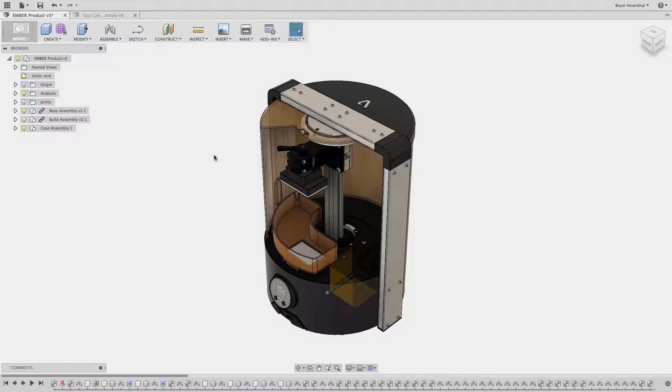To start, while designing, usually a tool is used to create complex surfacing, then another tool is used to add parametric features, then another tool is used to make direct modeling changes. Fusion 360 is a surface, parametric, freeform, and direct modeler all in one package. We will start by demonstrating this in the Ember assembly.

To start off, we will open up a subassembly of the top cabinet assembly. I will open the assembly out of the browser, which is like our assembly tree on the left side. Also notice my feature-based timeline is at the bottom of Fusion 360. We will talk more about these two being in the same environment throughout this demonstration.

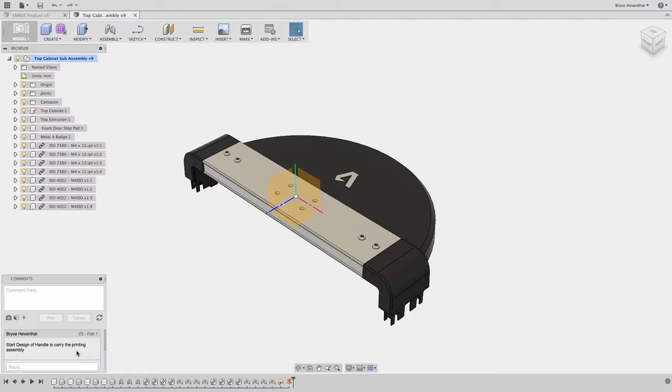Now, from within the design, we can see different decisions that were made throughout the design process in the commenting section. For this design, we will use the top-down design approach to design the handle. So let's start a sketch on the front plane. Notice that I didn't have to create a new file or component or activate a component. I just put the sketch at the top level of the assembly.

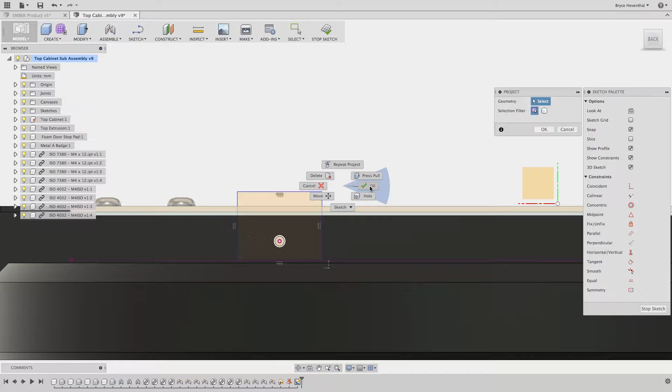Fusion 360 gives us the ability to have sketches, bodies, and components all in one file. We will start off by using a rectangle and use some construction lines to center this sketch about the hole. Then we can add a few dimensions to fully define our sketch.

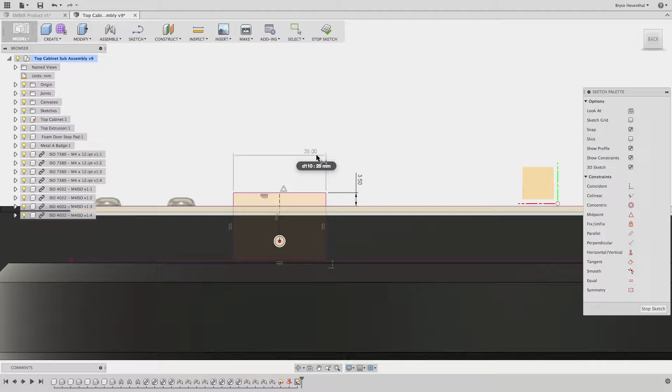The advantage of using the top-down design approach is that if the height of the top extrusion changes, the bracket of the handle will always remain 3.5 millimeters above the extrusion and centered over the hole. Now let's turn this 2D sketch into 3D geometry. I will select this top profile.

Notice Fusion 360 is intelligently guessing what type of operation I would like to use. In this case, Fusion 360 is joining the new extrude to the top extrusion component as highlighted in the browser. Now, if I wanted to select another profile that causes this extrude to run into an existing body, it will automatically convert into a cut operation. No need to have two different commands for similar Boolean operations.

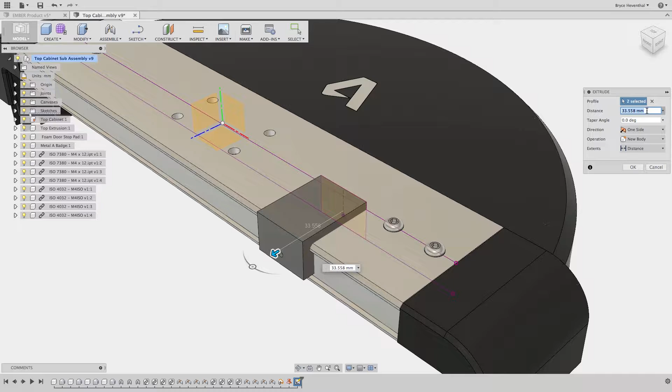Of course, I have the ability to change to join, cut, intersect, or add a new body or component. In this case, I will create a new body. I could create a component anywhere in the design process, but I will demonstrate this later. Now I have a body that is overlapping over this aluminum extrusion.

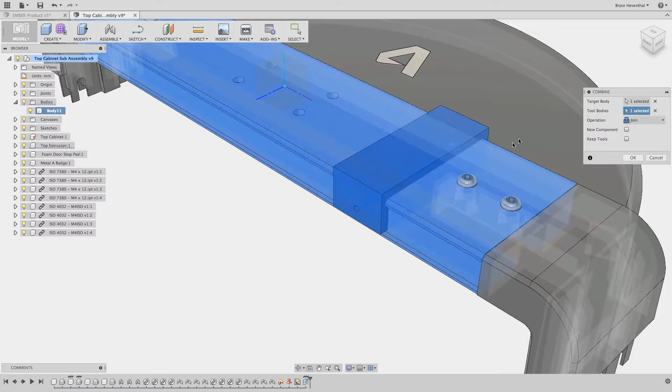We can see this interference with an interference detection. To get rid of this interference, we can use a combine Boolean cut operation. This will cut out the interfering section. There's an extra body from this cut operation on the inside which is unneeded. We can choose to remove this body and it will place a feature in the timeline.

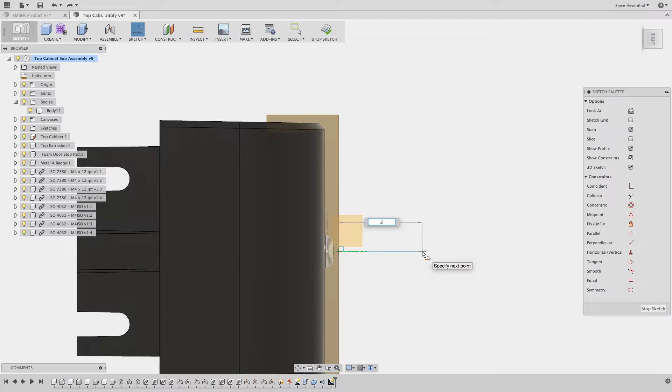If I ever need the body back to use in this design, I can simply roll back or suppress the removed feature. Now, I know I want the handle to be above the bracket by 25 millimeters, so I can create a sketch on the face to locate the handle. As I'm sketching, I can type in the dimensions of the sketch entities to sketch and define the sketch at the same time. This will truly speed up my sketching process.

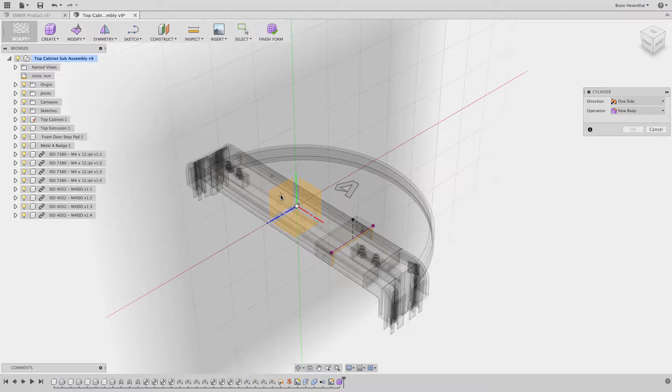Up to this point, we have been parametrically designing this bracket around the top cabinet assembly. Let's go ahead and jump into the sculpt environment. We'll start off by using one of the primitives, and then we will use simple push-pull gestures to sculpt our design into our desired shape. We can input our desired length and diameter of our handle.

Now, when I drag this slider, we get more or less faces depending on the direction I slide. Ideally, we would like to place more faces in areas of higher complexity. Using T-splines technology, we can add more faces where desired rather than having a lot of faces across the entire body, which will slow down my computational time.

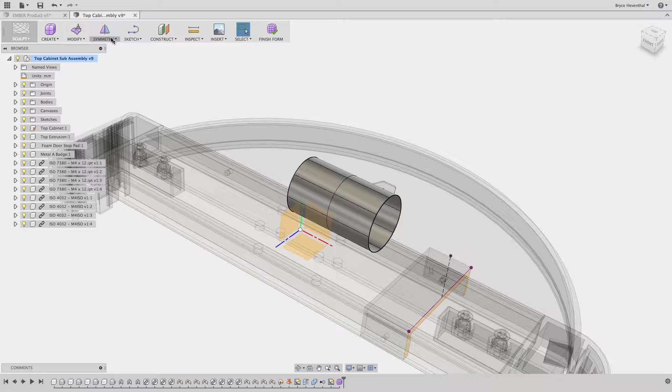Now, I want to add symmetry about the front and back of the handle. Fusion 360 will give us a green line for our symmetric plane. When we start sculpting, we can select faces, edges, and vertices to manipulate. Selecting faces influences our design more than edges and vertices, and then selecting edges influences higher than vertices.

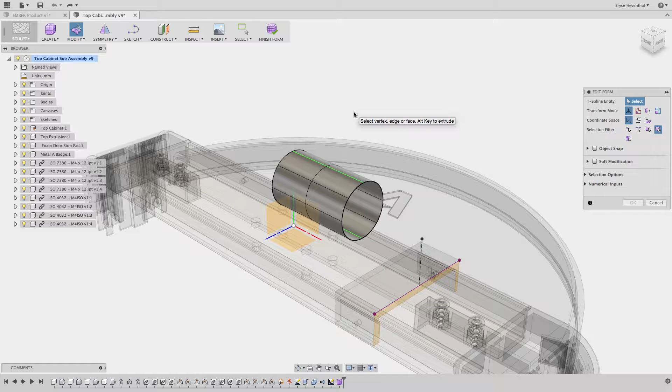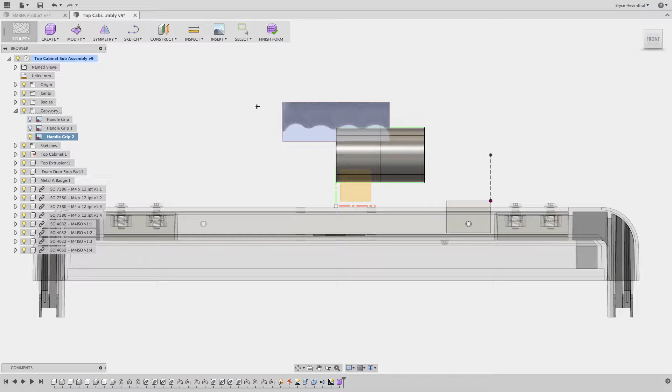Next, I have a reference image I want to use as a guide for our handle assembly. I will insert this as a canvas onto the XY plane. We can resize and relocate the image over our body. In addition, I will change the opacity and allow the image to be visible through the body. When importing images, there's no physical size associated with the image, so we can use the calibrate tool to size the image to the body we created.

Next, I will start forming our body to the image. Unfortunately, moving this edge does not give me the desired result. In this case, we need to add some edges to be able to get the desired result. I will select this inside edge and insert two edges on both sides. Now I can use these newly created edges to manipulate our design.

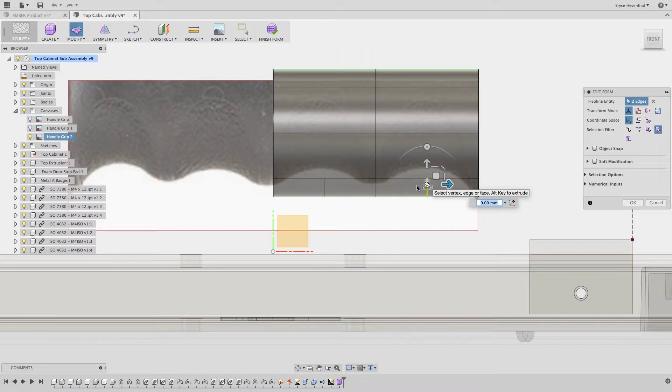Adding these new edges created a T-junction. This is where the T in T-splines comes from. We can add complexity by adding edges, and it forms these T-junctions. Once I have the entity selected, I can use the triad to either translate, scale, or rotate the selected entity. We can select this entire edge and make a flat portion for the palm of my hand to rest on.

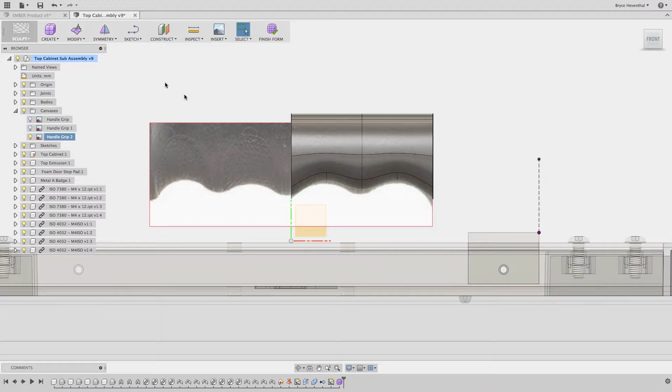I am designing half of the handle, and I'm going to mirror about this middle plane in the future, but I am worried about causing a sharp point in the middle. So we can mirror the T-spline body, and notice that this body is always trying to retain its curvature continuous nature as I make changes.

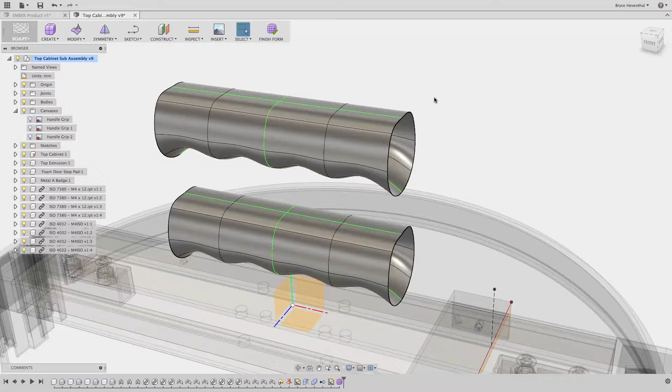Now we've come to a point where we want to see some different design ideas. I can copy and paste my body and move it above my current body. Here we can make some changes to the newly copied body to quickly iterate on many design ideas. This will help flush out some bad ideas before arriving at the perfect idea for our concept. We will use the soft modification to influence the fall off as we manipulate these faces and edges. I like the new design, but I think the original handle will be more versatile, so we will run with the flat handle design.

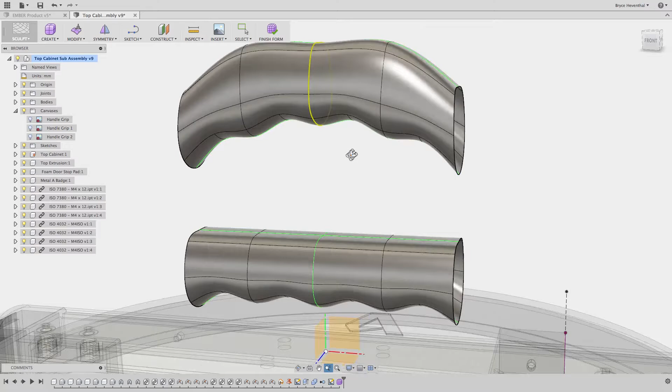Next, I want to start working on the transition to the bracket of the handle I created earlier. I'm going to use this great tool called Convert. In this case, Convert can be used to convert a parametric face into a T-spline body. Then I could start deleting these faces where I want the transition to occur. This new body is just like any other T-spline body. I could use my push-pull gestures to scale and move. I can also add faces where needed to help control the transition.

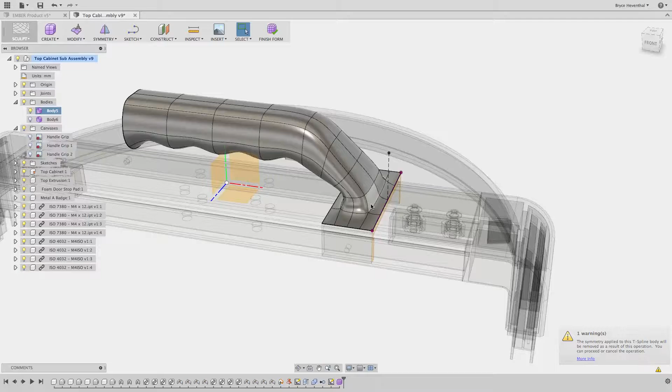Now I'm set for combining my two T-spline bodies. Let's use a bridge to bridge the gap. Fusion 360 will automatically calculate the transition for our design. This new body behaves just like before, where I can use my push-pull gestures to dial in the shape of our design.

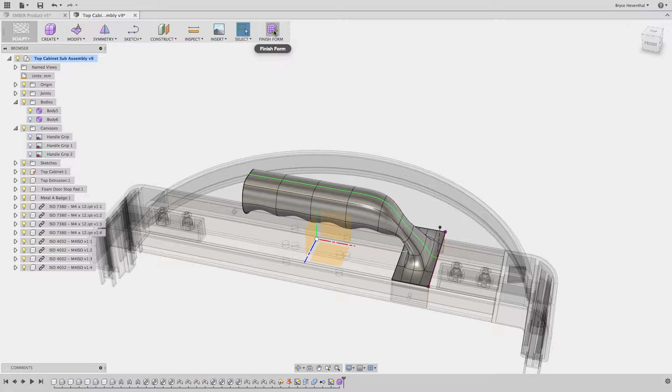Now, I'm just about the point where I've completed the sculpted body, so let's go ahead and finish this form. Once I exit this freeform workspace, the body is automatically converted into a NURBS surface. I can use this just like any other surface in Fusion 360. In this case, I want to use it to form half of my handle.

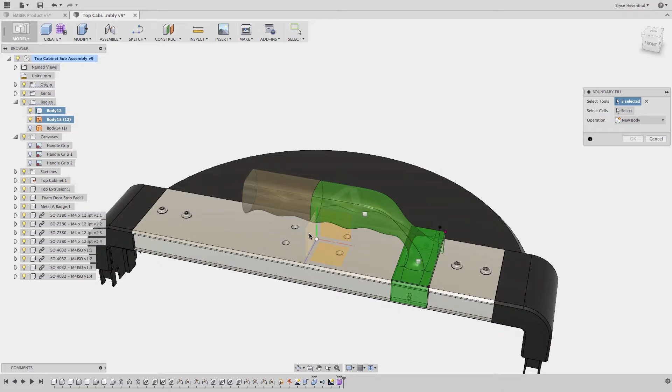So I will create a boundary fill. This tool will find different volumes from my selected tools. Once I select my tools, I can select the different volumes I want to keep. Then I am left with a few tool bodies and half of my handle. I will proceed with removing a few bodies to keep my browser clean.

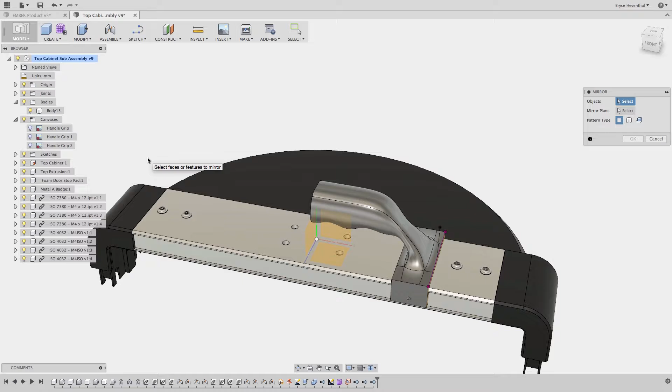Now let's work on completing this handle. I sometimes forget where commands are located though, so we can search for commands and add them to my toolbox if I'm going to use them frequently. Fusion 360 makes it easy to locate commands so you could keep your mind on the design. In this case, we searched for the mirror command and then created the mirrored half of our handle. Then we can quickly combine them back into one body.

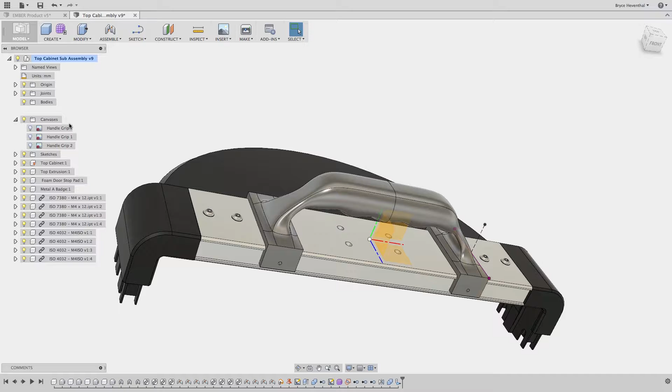Till this point, we have been working on a body at the top level of this top cabinet assembly. Two main reasons to turn a body into a component is for bill of materials or assembly motion. Fusion 360 allows an engineer to turn bodies into components when convenient in the design process. We can give this new component a part name.

Next, I want to create an overmolding for a rubber gripping surface. So let's create a sketch to use as a cutting tool. I will sketch a spline to get a curved gripping surface. In addition, I will create a center line to use for symmetry.

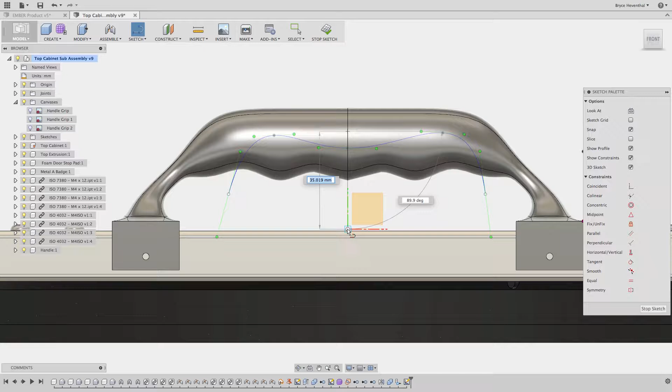If I'm going to apply the same constraint to several sketch entities, I can select the constraint out of the sketch palette and the constraint will remain on, so I can rapidly apply this constraint to multiple sketch entities. No need to control select multiple entities, then select the constraint out of a submenu over and over.

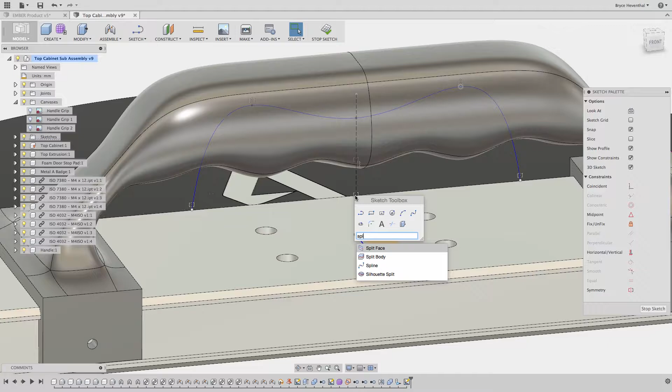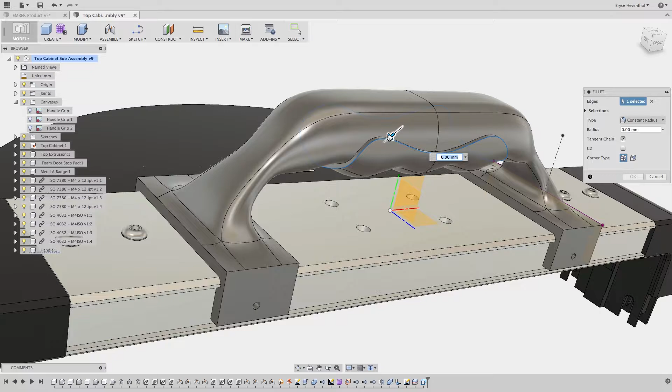Now, when I select an edge, press pull will turn into a fillet. This tool will change depending on what is selected and help design faster rather than searching for the correct command. Now make sure you pay attention. Here's the cool part. I have created a freeform gripping surface for the handle. Then I made some parametric changes to it.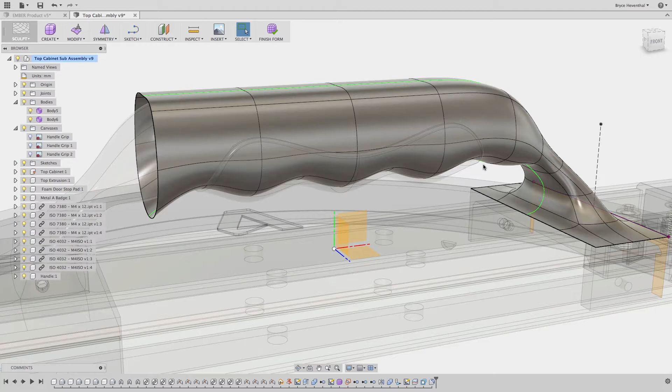Usually when a design change is required to the freeform surface created early in the design process, multiple changes are required between multiple tools. In Fusion 360's integrated tool set, when I make a design change to the surface, the downstream features will update accordingly. No need to recreate surfaces or fix a bunch of red and yellow features in the feature manager tree.

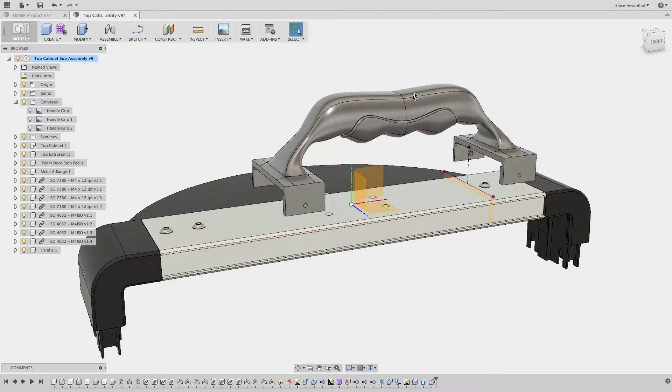Now, this component is floating in space right now and doesn't know how it interacts with the rest of the assembly. Fusion 360 has rethought how designs are assembled. First, the assembly tree and the feature tree are in the same file. Second, this handle was designed in context of the assembly, so why do we need to pull it apart to apply mates or constraints to assemble it back together? We have an as-built joint for components designed in context.

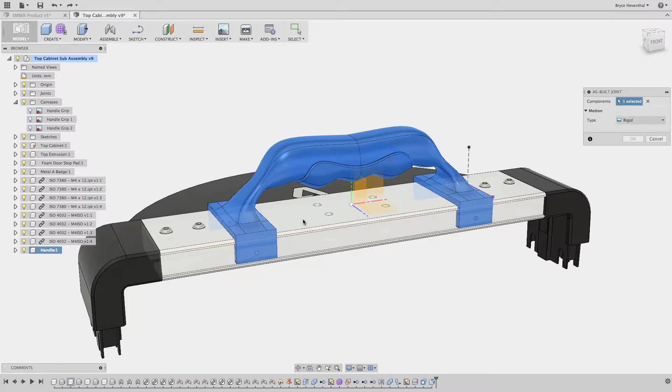Third, when mating or applying constraints, usually an engineer is trying to lock down all 6 degrees of freedom, 3 translations and 3 rotations. This usually takes about 2 to 3 constraints or mates to get the desired motion. In Fusion 360, we apply one joint. We lock all 6 degrees of freedom down and change the joint type to get the desired assembly motion. This will help designs get assembled faster and behave more robustly when design changes are made.

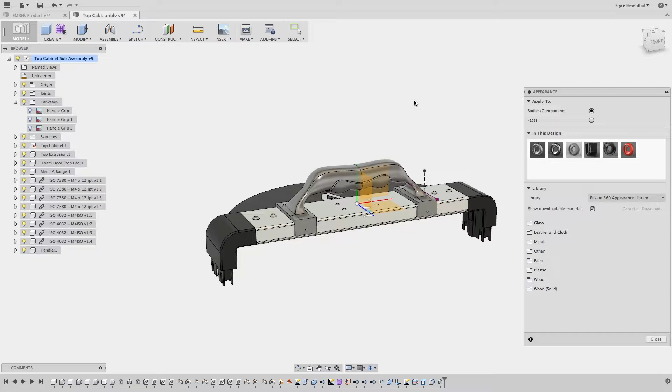Finally, I will go ahead and add a few appearances to our handle. I will access our customizable appearance library to apply a red plastic appearance to the handle and a rubber appearance to the gripping portion.

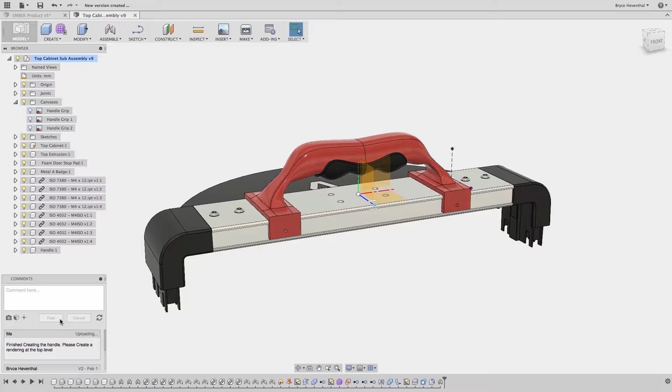Now that we have completed our design for our handle, we can leave a comment documenting the design changes. This comment will travel with the design and produce a trail of how and when design decisions were made in the design process. In addition, this will save a new version of the design. Don't worry, if I screw up, we can always roll back to a previous version.

Let's switch over to the top level assembly. Whoa, you might notice my handle is not in the assembly. Why hasn't it updated? Well, in Fusion 360, we don't automatically update the reference to the latest version. In other tools, sometimes bad design changes are made, and they are propagated to the top level assembly. We allow the user to choose when to update to the current version.

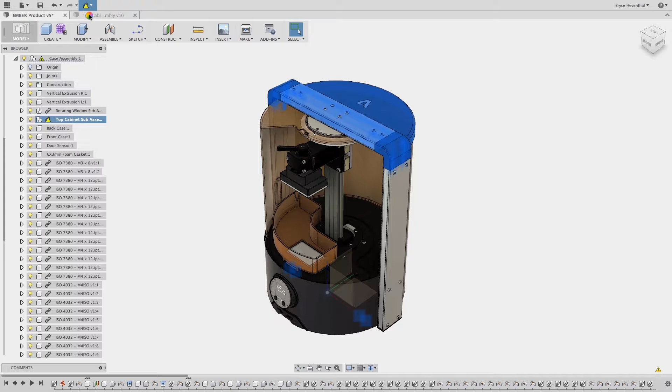In addition, we can always choose an older version, just in case the changes I made would cause errors. This will prevent design teams from having to fix red assembly trees from unwanted changes to the top level assembly. Versioning is inherently built into Fusion 360 and doesn't require a complex PDM system to implement.

Now we have a need to produce a rendering of this design for marketing. Let's switch over to the rendering workspace. Here we can change the scene and scene settings, such as adding depth of field to this image. Finally, I could turn on the ray tracing to leverage my computer's hardware to calculate the light bounces in this image. Unfortunately, I need to start producing CAM toolpaths to run my Haas mill.

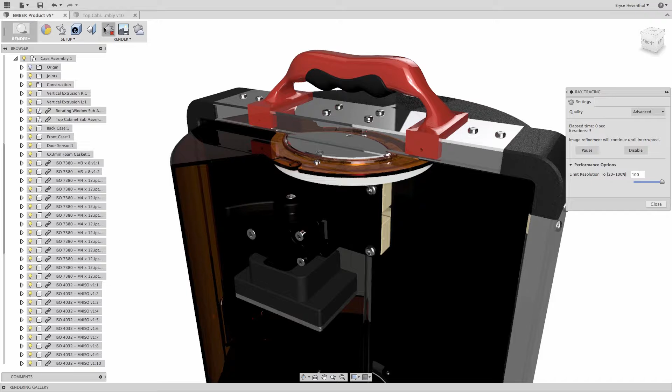While this image is being rendered, it is using up a majority of my computer's resources. Instead, I could start a cloud render. This will leverage the nearly infinite resources of cloud computing. I can set a few parameters, and in a few minutes, Fusion 360 will return a render without having to stall my design team from leveraging their computer's hardware.

While that is being rendered, let's check out the design in A360. This is Fusion 360's data management and collaboration tool. A360 is an essential part for a design team to work together and understand how different design data is related. Let's jump to one of the subassemblies of this top-level assembly.

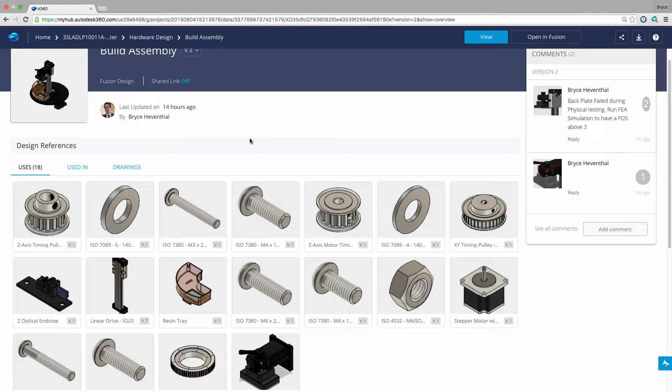In a web browser, I can see what design my file is referencing, where it is being referenced, and any drawings that may have been created. It is also a great tool for non-CAD personnel to collaborate throughout the design process. A360 also displays the related data created during the design process in other workspaces, such as CAM, animations, rendering, and simulation results.

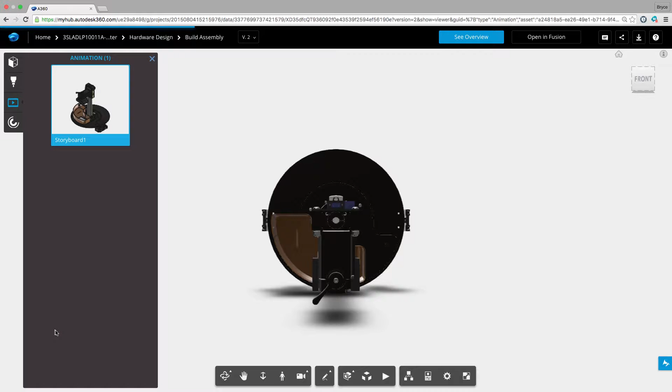Right in a web browser, we can jump into the immersive experience and see the animation created within Fusion 360. In addition, I could jump into the design and interrogate the assembly tree and see which components this design uses, such as what type of fasteners I chose to use for the printing bed.

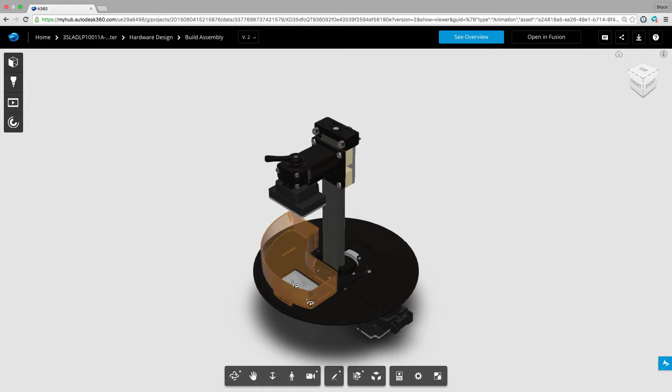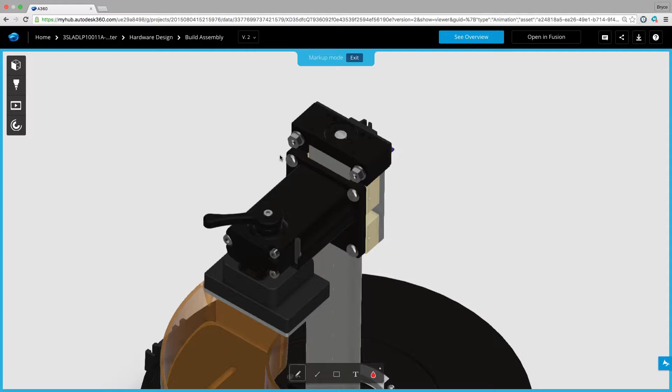Let's open up the commenting pane. Here we can see different comments that have been made throughout the design process. Usually these are key design decisions made between multiple stakeholders' email boxes. Now I have a centralized location for all design decisions made throughout the design process that can be audited for when and why decisions were made.

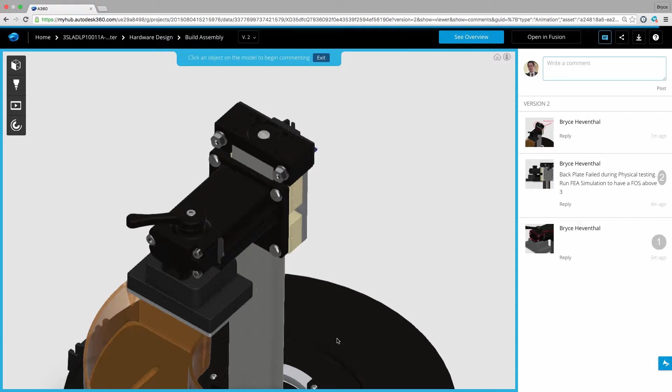We could start redlining our design right in a web browser to better illustrate required design changes. Gone are the days where we would have to try to describe with text what we wanted changed in the design. In addition to redlining, we can create comments on points or objects. These will produce a balloon referencing the selected entity to better illustrate what needs to be changed.

Of course, any of these comments can be seen in Fusion 360 as well. No matter where you are, an engineer can hop on a web browser and still collaborate on key decisions that need to be made throughout the design process.

Now we need some input on a design change from some external stakeholders. From Fusion 360, I could start a live review session. This will generate a link which I can copy and paste into an email. Once my external stakeholder receives the email, they can click on the link and it will open up in a web browser. An interactive web experience will be open in the web browser where they can collaborate on design changes.

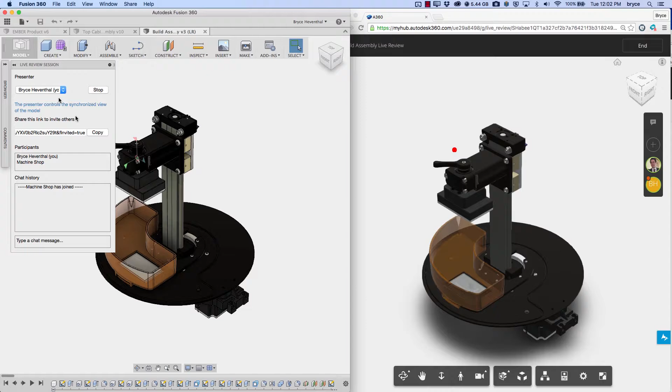Here I can choose the driver and make design changes. In real time, the design changes are propagated to their session. In addition, I can choose to make them the presenter. They can collaborate on what needs to be changed from a web browser anywhere in the world. This will truly change the way design teams collaborate with both internal and external stakeholders.

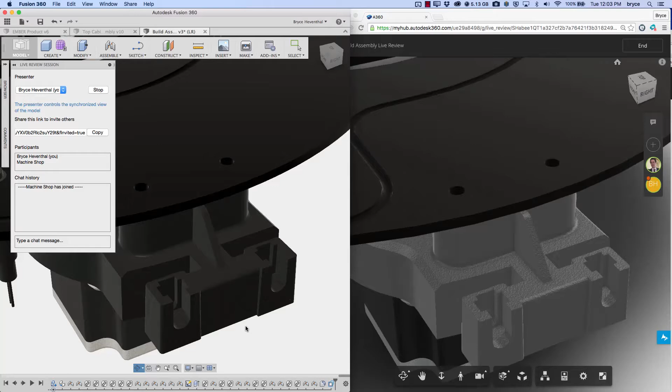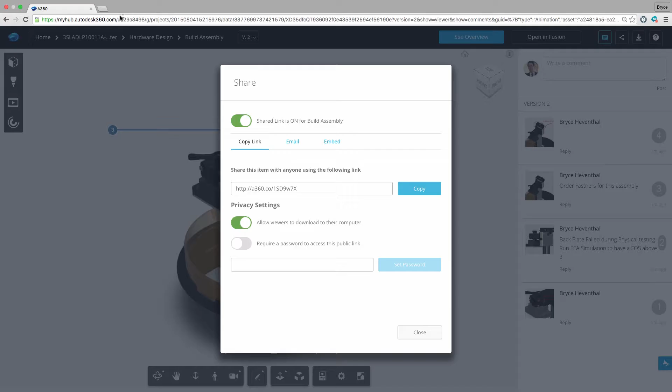Now, I need to send a file to a machine shop for them to start some post-processing work. I can start by sharing a link. Here I can give them access to download the file or password protect the link. Once they click on the link, they will see the design in a web browser. Here, they can choose which file format works best for their post-processing tools. There is no need to download a viewer or worry about file compatibility or send them the wrong file type.

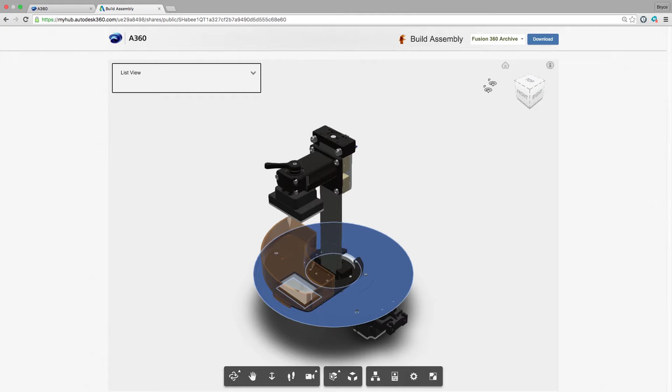This shared link changes the way design teams will work with external stakeholders. Of course, I can close the link to stop access to the file in case I no longer want to share my design with external stakeholders.

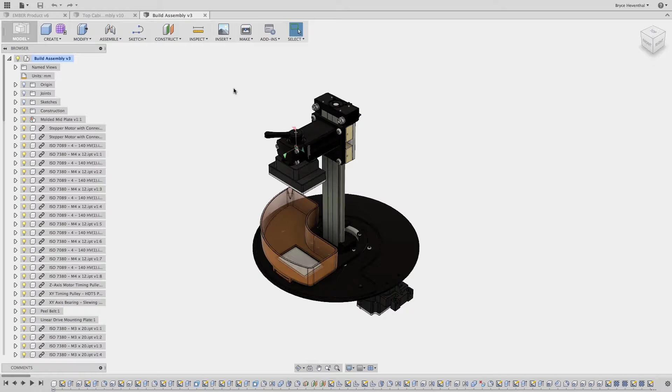Throughout this demonstration, we have seen how we can have multiple designers, engineers, managers, and external stakeholders collaborate on a design. We have also seen how Fusion 360 integrates different modeling techniques, such as freeform, parametric, surface, and direct modeling, all in one package. Now, we will demonstrate how Fusion 360 integrates post-processes such as simulation, CAM, rendering, and animations. These post-processes will update accordingly from design changes made throughout the design process, which will reduce the amount of rework required to set up these processes.

We will open up a linear drive subassembly to start setting up the required procedures to start generating G-code to start running my Haas mill. CAM toolpaths can be generated in the CAM workspace, which will update from design changes. Once in the CAM workspace, we can see different CAM commands to help program our part. We can start by creating our first setup. We will orient the Z-axis and pick the location for the pickup of our part. We will use this corner to probe when locating our part in our machine.

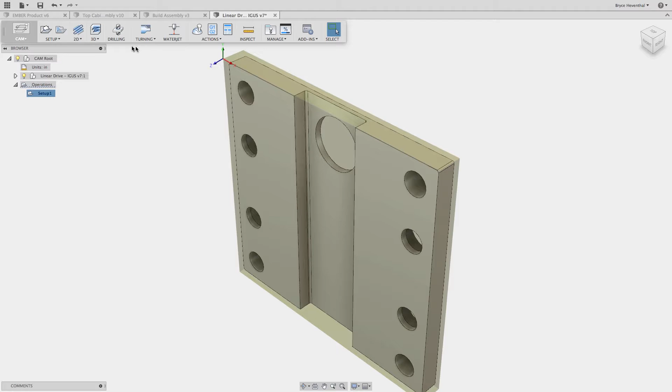Normally, we would take this time to measure our stock with calipers, and we can input these values on the stock tab to ensure our part is cut to the correct dimensions. Next, we can start by facing our stock to our part. To do this, we can select the facing operation, select the face, and hit OK. In a few clicks, we have generated our first toolpath.

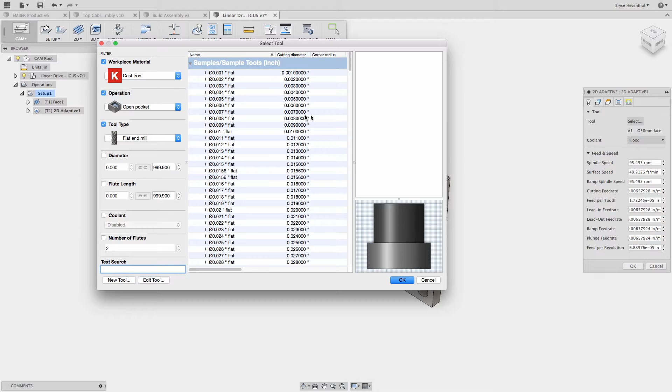Now, let's start roughing out the inside slot with an adaptive clearing toolpath. Adaptive clearing is a roughing strategy available for clearing large quantities of material effectively. It is unique in that it guarantees a maximum tool load at all stages of the machining cycle. Our roughing toolpath will ensure that wear is uniform across the length of the tool.

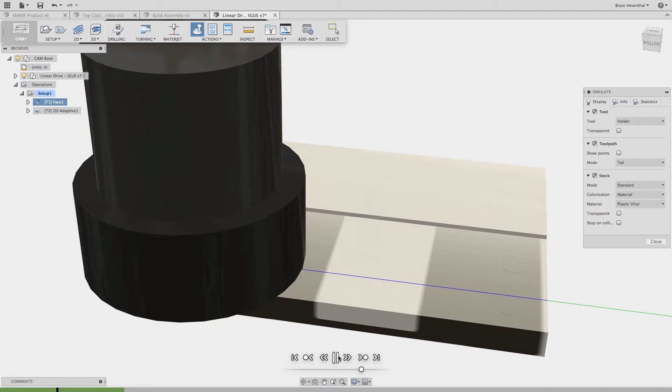Finally, let's ensure that we don't crash our tool by simulating our toolpaths. Simulating our toolpath ensures that our parts are being cut correctly and we don't make any costly mistakes such as running the tool into a vise. We can use a timeline at the bottom to jump to different points in the simulation to interrogate how our machine will be cutting our part.

Finally, we can post our G-code. Fusion 360 has different post processors to run the most versatile of machine shops. Once the G-code is posted, we can look at our code in Brackets and make any required changes to the G-code.

While I was generating the toolpaths necessary to run my Haas mill, I've been asked to run a finite element simulation to ensure our design can meet a 50-pound load while the printer is in operation. Just like the CAM workspace, we can switch over to the simulation workspace to start setting up our finite element analysis. First, let's start by creating a new study. Fusion 360 has the ability to run static, frequency, thermal, and thermal stress studies.

We start by simplifying this problem by suppressing components that are not required for the simulation. Next, we can access our customizable material library to assign an aluminum material to the back plate. One of the most common mistakes while setting up a finite element analysis is either over or under constraining your problem. Fusion 360 allows us to turn on our degree of freedom plot to help solve this problem. This will help visualize what components are still left to be locked down.

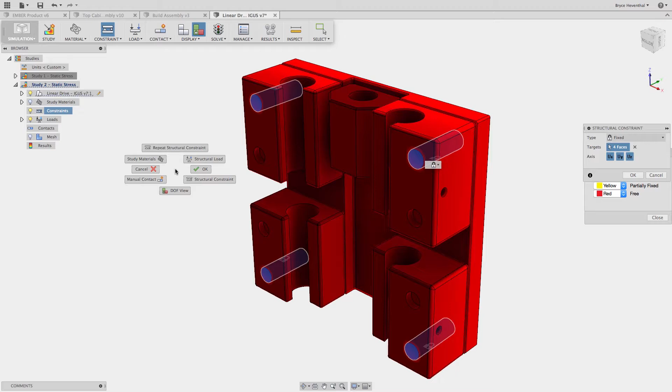We can start by adding a few constraints. These holes are fixed to the Ember printing bed, so we can assume they will be fixed. Next, these slots are able to slide along a rail, so we will assume a frictionless constraint. Now we need to add some contacts.

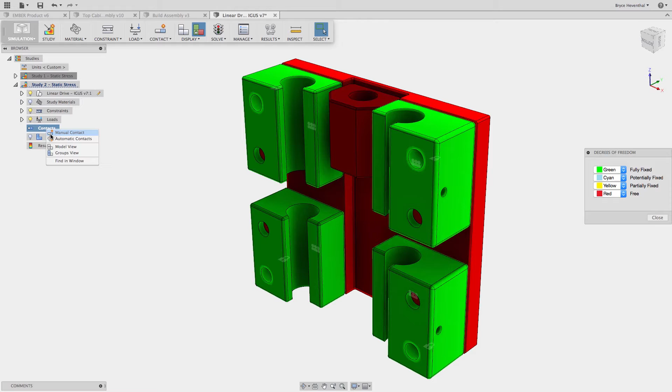Contacts are used to describe how components interact with each other. In this case, I'm going to use automatic contacts. I have told Fusion 360 to look for faces within a 0.1 mm tolerance and make a bonded contact. Fusion 360 will find the corresponding faces. If I need to switch a few to a sliding contact or turn them off, I have the ability to quickly do so.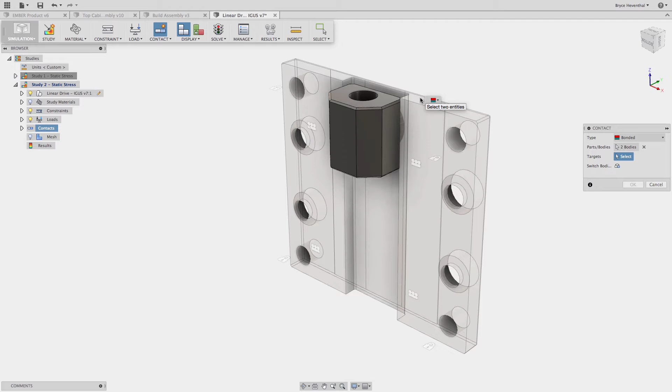Lastly, I need to add a manual contact. Usually this requires a lot of hiding and showing of components. In Fusion 360, we select the two components, then it will make one of the components transparent, allowing me to select the solid component's face without any trouble. Then repeat the process for the second component. This will speed up the process to set up any finite element analysis problem.

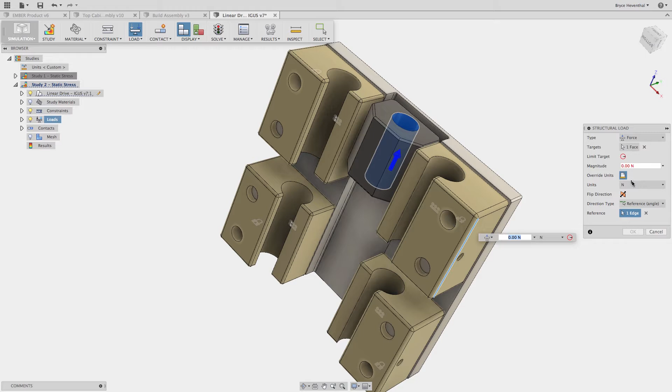Now we want this assembly to survive a 50-pound load experienced while the printer is in operation and have a factor of safety above 3. So let's apply a 50-pound load and change the direction that the load is being applied. The last thing to do before solving is changing the mesh. Here we can make a finer mesh and turn on second-order tetrahedral elements because we are solving for stresses in this scenario. So let's solve and let Fusion 360 analyze this design.

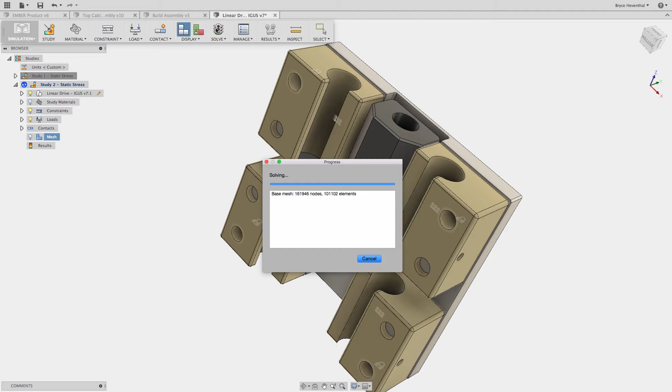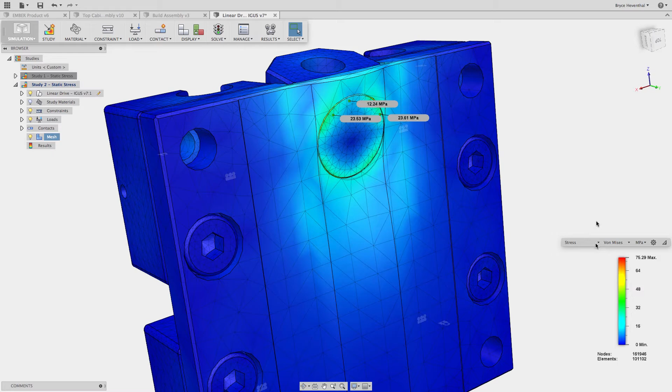Normally, we would want to ensure that our simulation converges on a stress value. In that case, I would turn on our mesh adaptation tools, which will refine our mesh in areas of high concentration. Now that Fusion 360 has solved our simulation, we can interrogate our results by looking at different plots such as safety factor, stress, and displacement. In addition, we can use tools such as surface probes, slicing planes, and animations to see how stress is distributed through the design as the 50-pound load is being applied.

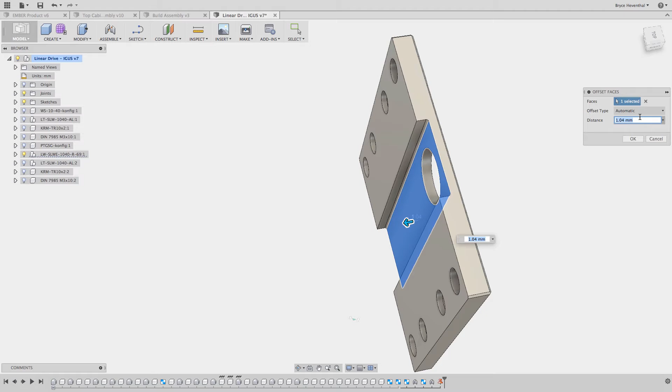Unfortunately, the current design did not meet our design requirements for a factor of safety of 3. So let's jump back into the modeling workspace to make a few design changes. We can use Fusion 360's direct modeling tools to thicken the inside slot by 1.04 mm. Now, if I was using tools that weren't integrated and didn't reflect the design changes made throughout the design process, I would have to reproduce the work required to set up the simulation and CAM toolpaths. In Fusion 360's integrated workspaces, I could jump right back into the simulation environment and hit Solve again.

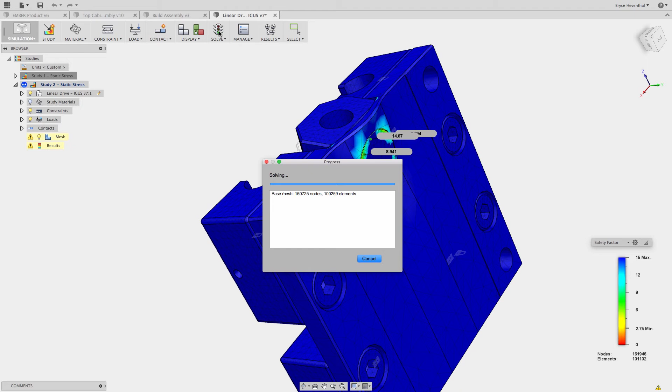This integration is required in today's design process to test many different scenarios. Imagine if I had to set up every simulation for a few design changes. In Fusion 360, I can make a design change, jump back into the simulation workspace, and run it again to ensure we have the best design before going to production.

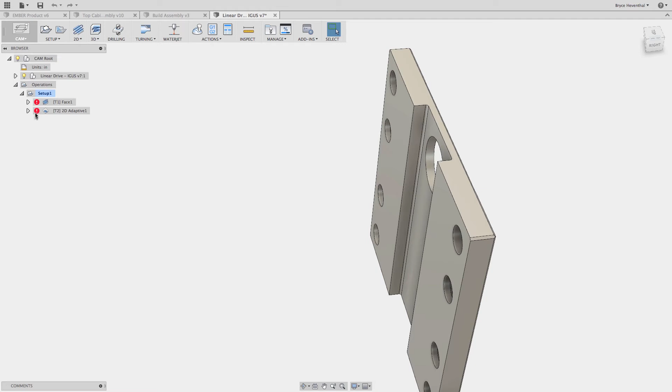Just like the simulation workspace, the CAM workspace will update with a thicker plate. I can right-click on the Setup folder and select Generate Toolpaths to reflect the thicker plate. Then I could run the simulation to ensure my part will be cut correctly. And of course, I could post this out again to send to my machine to start cutting parts with the new design changes.

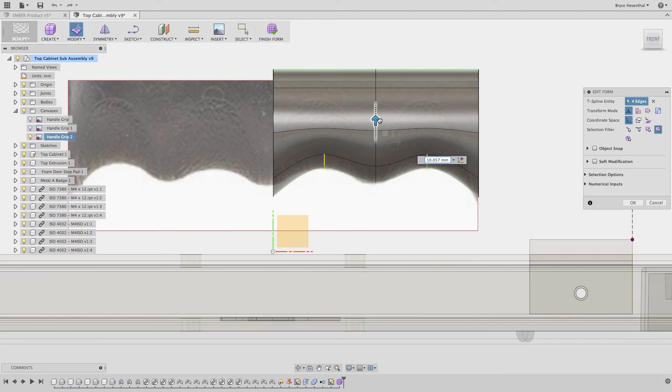Throughout this demonstration, we have shown how Fusion 360 has integrated different modeling techniques such as surfacing, freeform, parametric, and direct modeling. Also, Fusion 360 integrates different post processes such as renderings, animations, simulations, and CAM toolpaths. These different types of integrations ensure that if a design change is made anywhere in the design process, downstream data also reflects these changes. This will ensure that design teams will save time instead of doing rework.

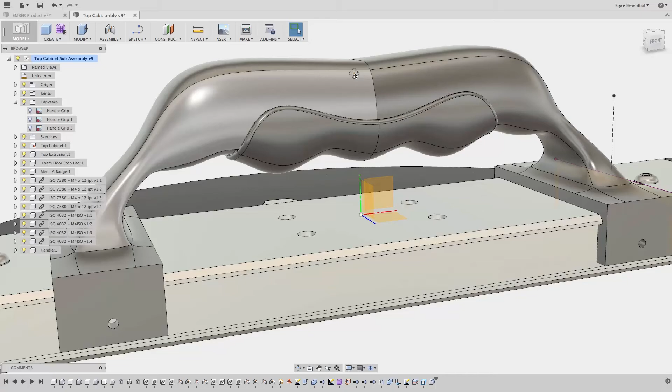Also, we have leveraged the cloud to collaborate with our design team. We were able to create comments and red lines which illustrate key design decisions. These comments travel with the file and produce an auditable trail of when and why decisions were made. Also, we were able to stay connected to our data via a browser or the Fusion 360 mobile app, which is available for iOS or Android.

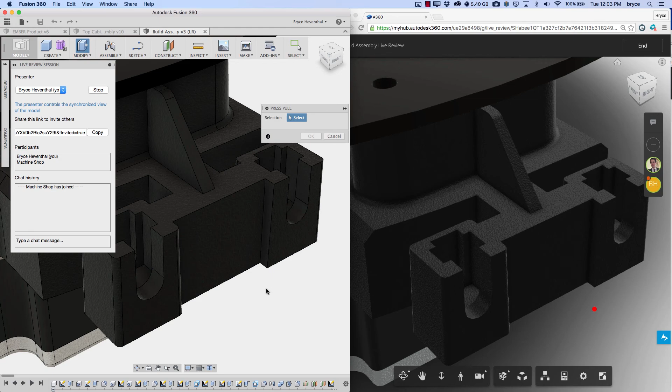Finally, we have given access to a variety of tools such as high-end design, visualization, documentation, simulation, and manufacturing tools. Usually these are different tools which each have an expensive price point and subscription cost.